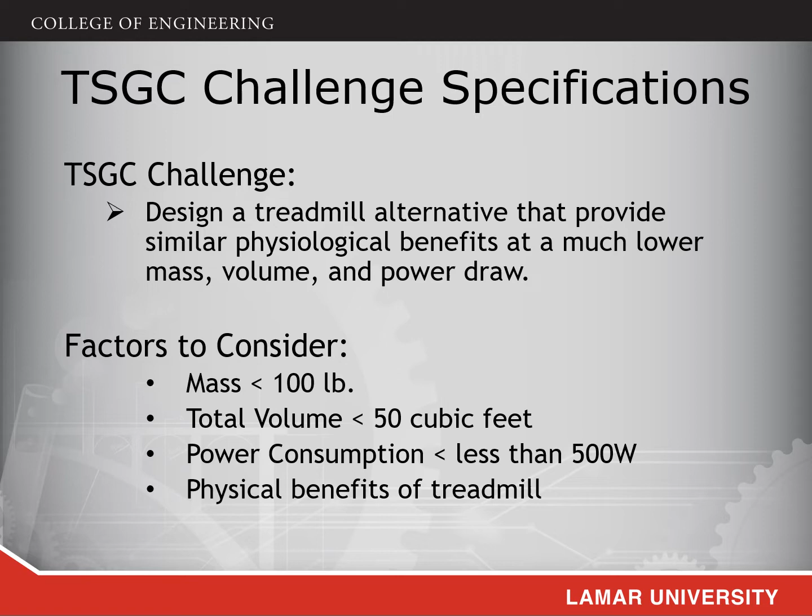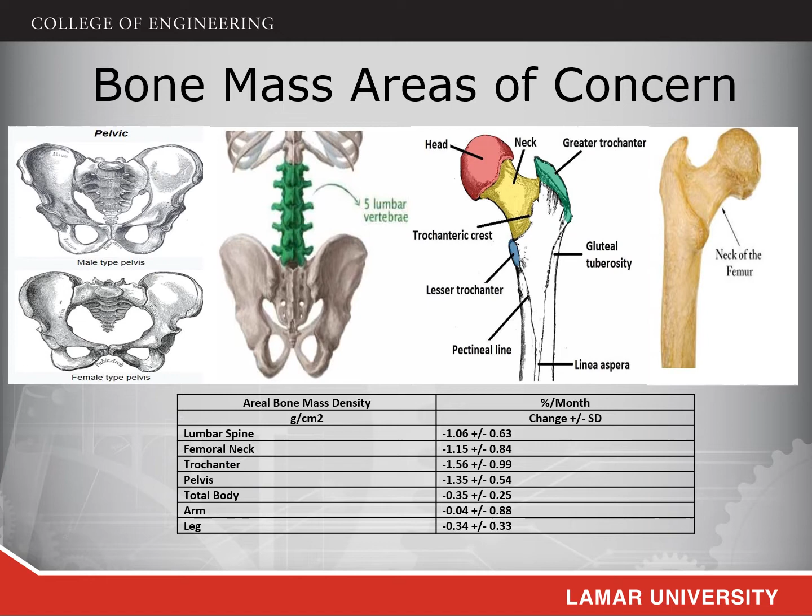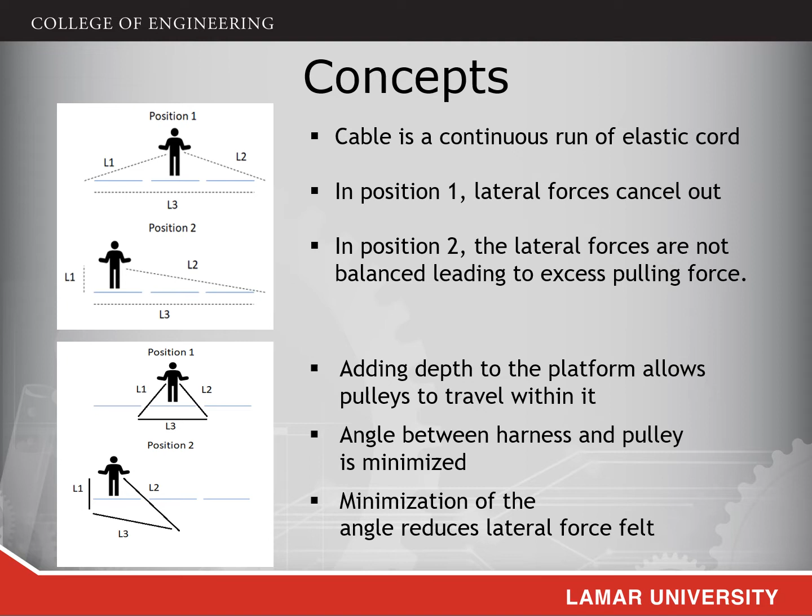When the user is in the extreme left position, our calculations showed that lateral forces would be excessive due to the extreme angle of the more distant pulley. In a later iteration of the concept, shown at the bottom, the team decided to use moving pulleys that would move with the user. This, plus putting the track on an angle, served to reduce the severity of the angle, thereby reducing the calculated side load of the user to an acceptable level.

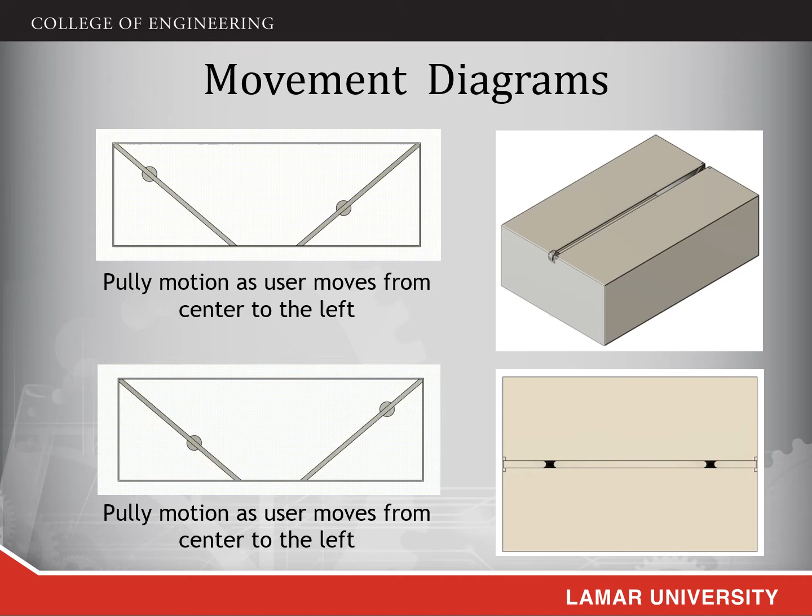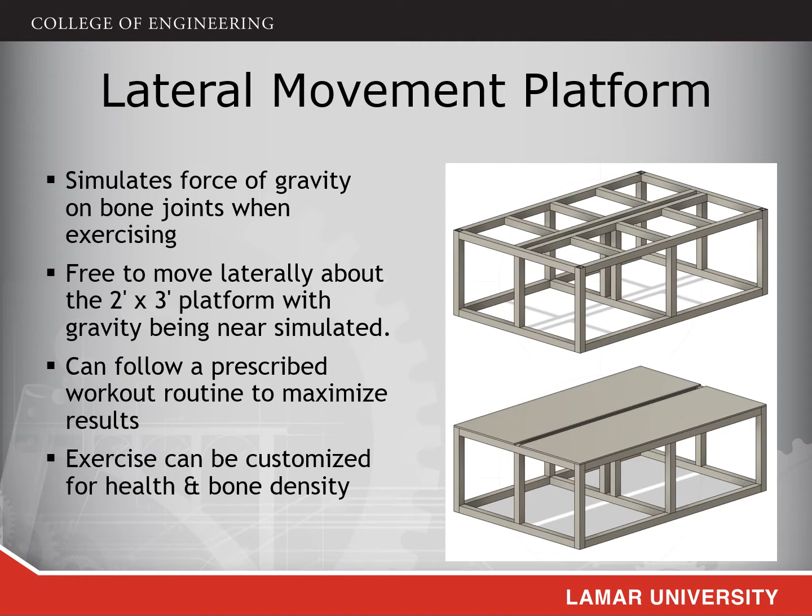The frame for the platform is proposed to be built from titanium. Titanium was chosen for its desirable weight and strength properties. The model calculated weight is 66 pounds and appears to perform well in the FEA for the frame. This weight easily falls within the design requirements. The frame skeleton was modeled as 1-inch square tubing with 0.15-inch thick side panels and 0.2-inch thick top panels.

For the finite element analysis, we chose to do a 400-pound impact on a location that we perceive to be one of the weakest on the platform. The structure, being of skeletal tubing, has several overhanging locations. These locations are the weak points of the surface. The surface is made up of 8 equal squares with overhangs in the center of each. We chose to use a single square to impact with the entire force, representing a bad case scenario for the structure.

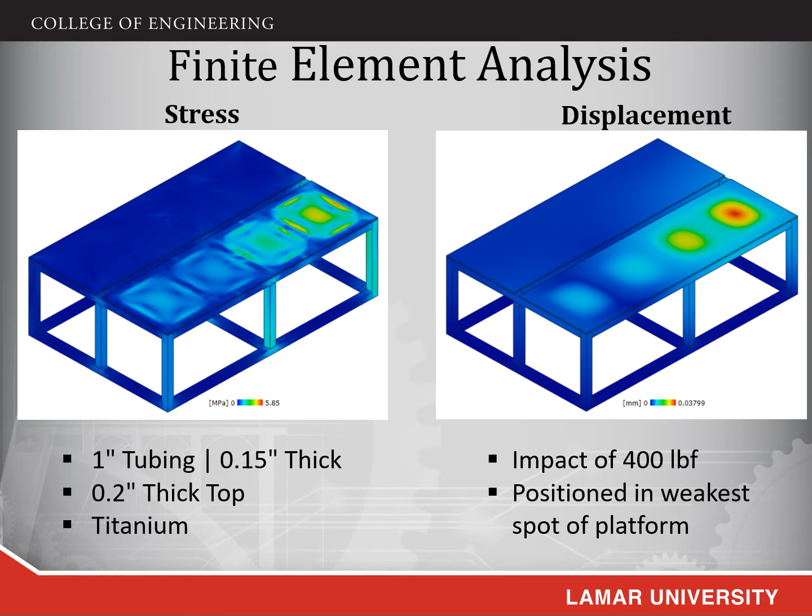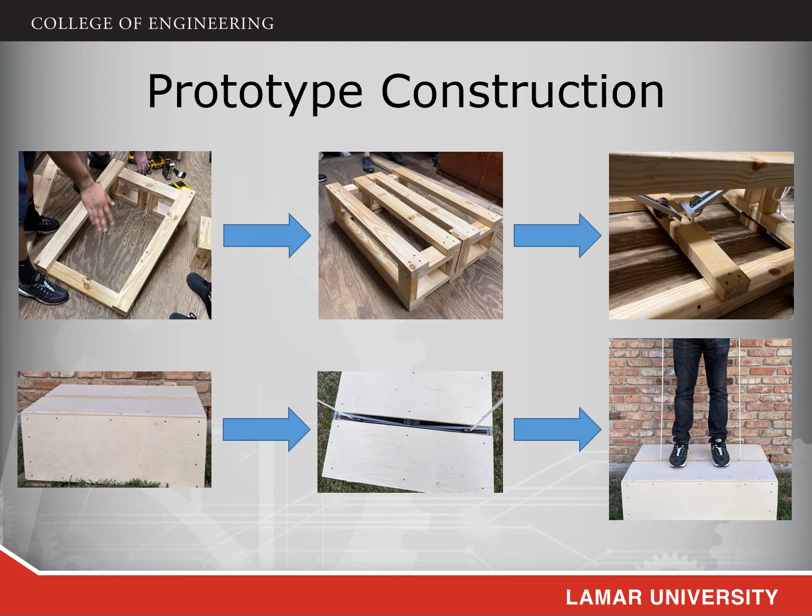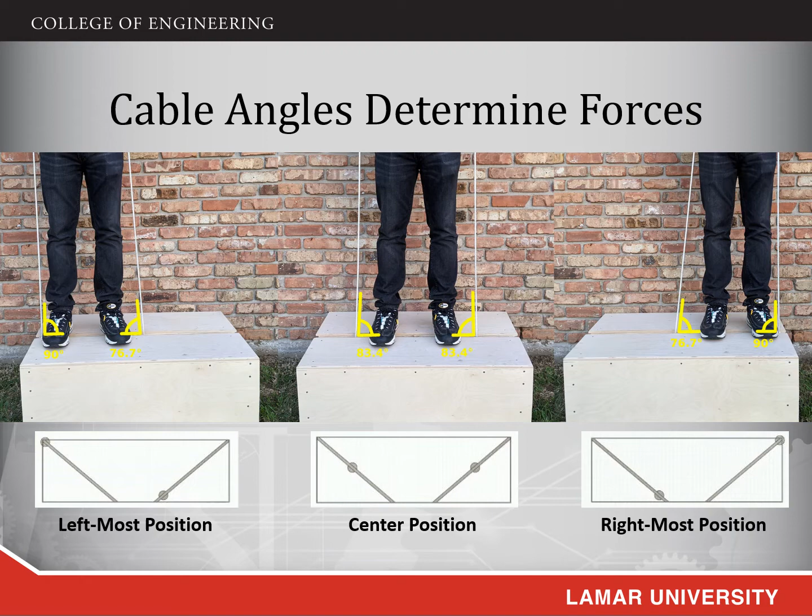But as you can see, due to the changing angles as the user moves to the far left or to the far right of the platform, they will experience some lateral forces, though these forces have been decreased significantly due to the pulley system. The renderings below show the position of the pulleys themselves as the user takes the various positions. Here we explain the difference in lateral and vertical forces between our pulley system and one that would have the pulley locked onto the sides of the platform.

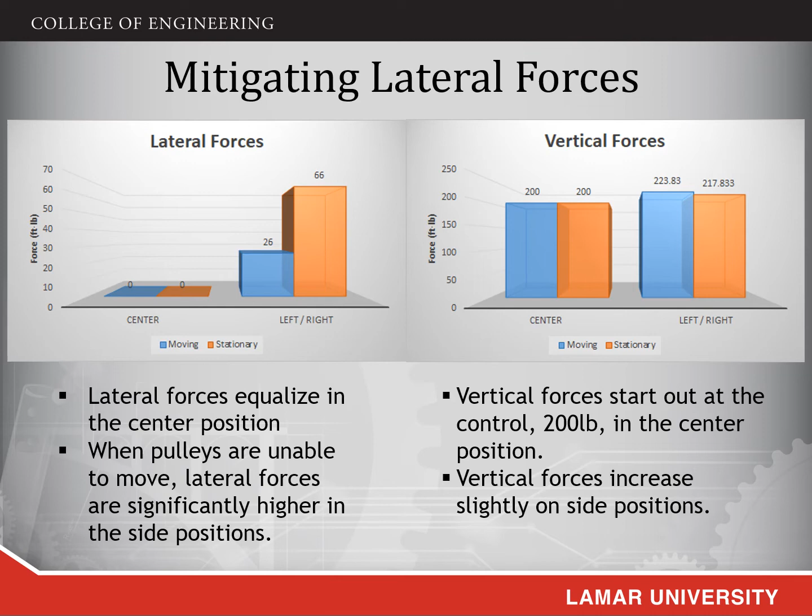And while this is a significant reduction from 66 pounds, 26 pounds is still a lot to have on the side while exercising. But modifications to the waist width and the angle difference can reduce that 26 pounds significantly.

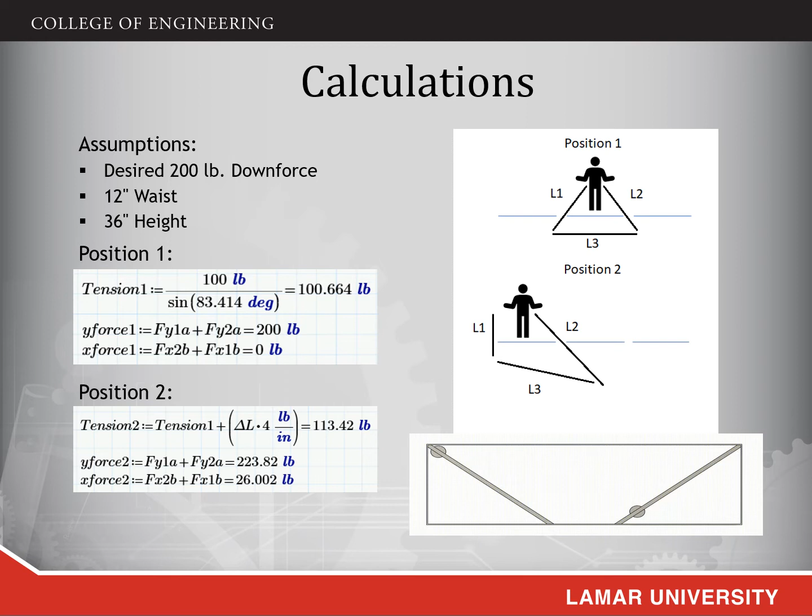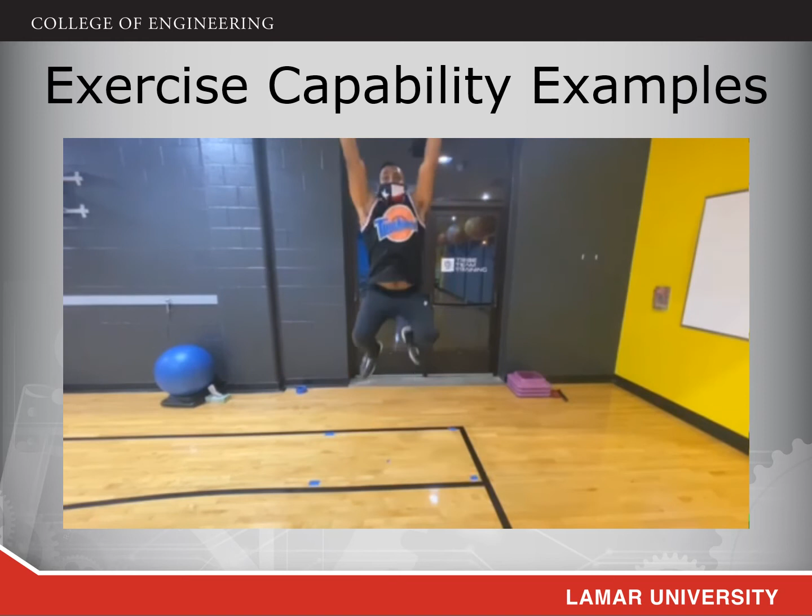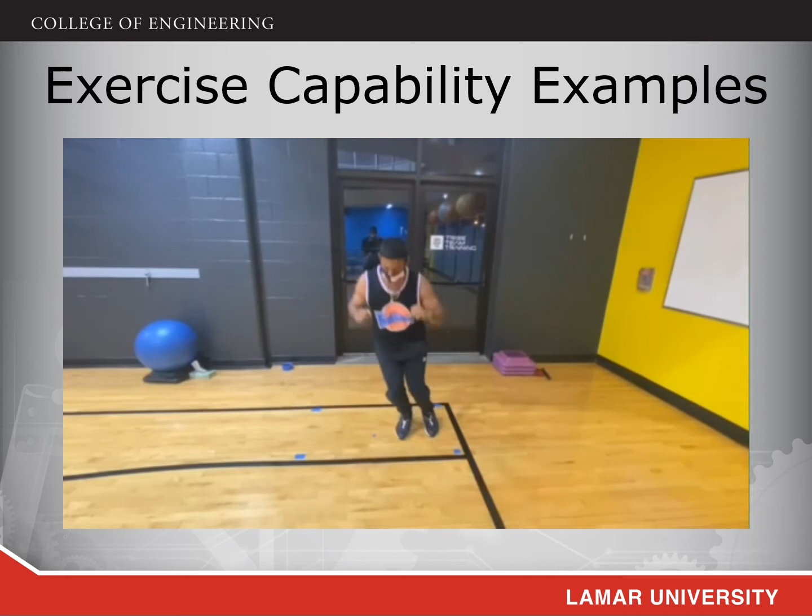Here are a few exercises that can be done in a 2x3 foot space using the lateral movement platform. You can do jumping jacks, squat jumps, side to side jumps, even mimic jump roping.

And with a platform that has multiple activity games, you can do yoga, boxing in place, and even do Dance Dance Revolution. Upon the completion of the prototype, the team was finally able to transform their design concept from a visualization into a reality. After a few test runs, numerous benefits were concluded which will apply to not only the user, but NASA as well.

As seen from the prototype construction, a main benefit is the simplicity of this design. This will lead to easy maintenance as the number of tools used will be kept at a minimum. Furthermore, considerable benefits are having the ability to retain spare weight for strength reinforcement, having the option to store items due to the platform being hollow, and maintaining the usage of power at an absolute zero.

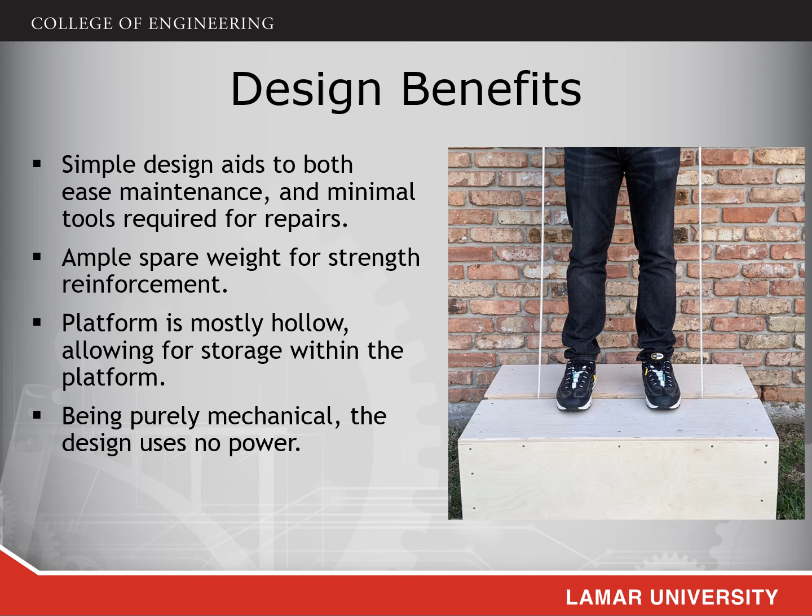In conclusion, the team was capable of designing and constructing a prototype for the duration of the fall and spring semesters which checked off each specification initially given by TSGC.